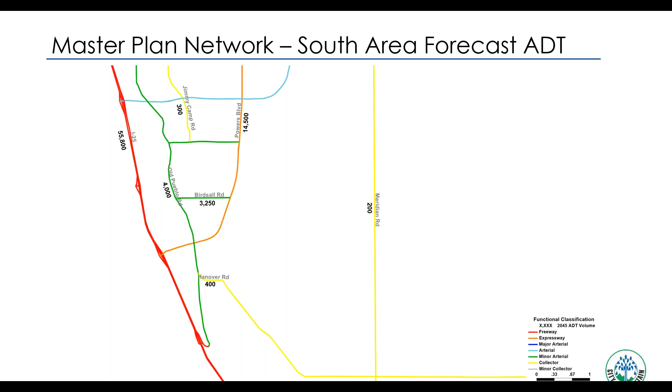Okay, just to let you know where we're going to go from here. We're going to be evaluating the carrying capacity of the proposed Transportation Master Plan network. We're going to use that to help create a funding framework, so we'll know the cost to build links that don't exist, the cost to widen - actually, I don't have the right bullets under this.

Anyway, here we'll be looking at what we know from the ODPs and reasonable adjacent, nearest neighbor, or county densities that we expect, and we'll redo the forecast that I just showed you - I apologize that I didn't fix these bullets. Then we'll develop cost estimates for the roadway improvements, and those will feed into creating the funding framework.

So you know that the City of Fountain approved an impact fee. They're not part of PPRTA, so that's something they're trying to do. The information from the Transportation Master Plan will feed into that to help them flesh it out more. At this point, I think it's my understanding that they've put in place kind of the same criteria that El Paso County has, but they know City of Fountain is unique, so this plan will help inform and change that. They'll also look at diversifying funding opportunities if there are state and federal options, and of course, with the funding, prioritizing.

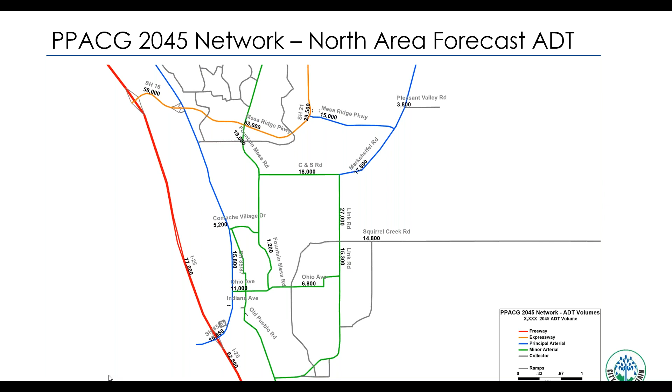My question is, have we looked at or can we look at adding a raised crossing somewhere, preferably in the south of Fountain, to allow more crossings? I know you said earlier you didn't want to add crossings to the existing railroad, and I understand and agree with that — that's why I'm asking about a raised crossing.

The other part of my answer was that we didn't want to have 2 crossings of Wilson and Link, but we did think it was a good goal to grade-separate the Wilson crossing. Yeah, okay, that's where I was going to jump in.

One thing we're actually looking at, because it makes some sense, is where Wilson and/or Link cross over the railroad. We're looking at the option of truly making that a grade separation ultimately, because we're trying to figure out from a geometric standpoint whether we can make that work with the grades and the existing properties that have access to Link in that area. We recognize that if the trains do stop, you have no way to get across without that.

Now, I think we all recognize there's really no opportunity to do any grade-separated crossings between Duckwood and Indiana at this point, just because of the proximity of the railroad and the properties. But we are looking at that, yes. Okay.

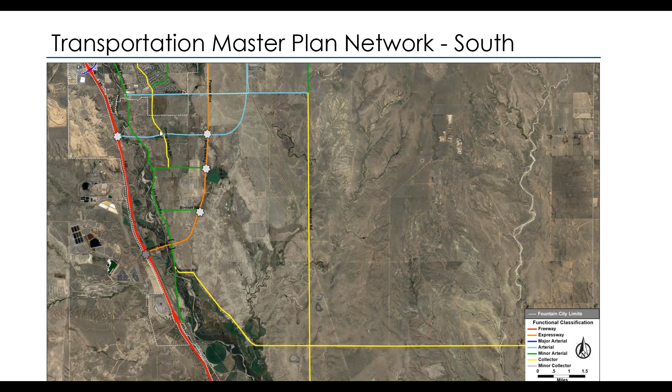Let's see, so CDOT is classifying it. Oh, you had it, go to that one, the CDOT one. CDOT is classifying it as a minor arterial.

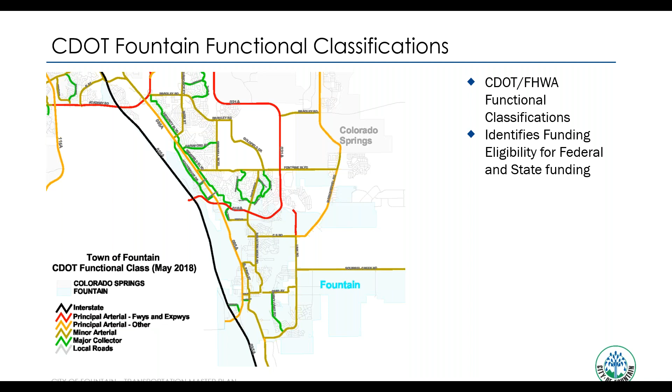Marksheffel to the north of Bradley is shown as an expressway. I wonder if it should continue as an expressway to create another ring road to complement Powers. Just a thought.

I'm going to ask Tucker for a little bit of clarification. So do you mean as it's coming south, through the city of Fountain, it should be increased to the same classification? I'll make that assumption and you can correct me if I'm wrong.

The reason it's staying at that classification is because, as you can see on this map, as you get further into Fountain, I've got homes on either side of that road, and the likelihood of me tearing down those homes is very small. If we had gone through this exercise 40 years ago, that would have been a different conversation. There still may be a day where Fountain grows to the point that all those homes are torn down and turn into apartments. I don't know, but I don't think I'm personally ready to put the city through that in the next 40 years. So I'm going to guess that was your question.

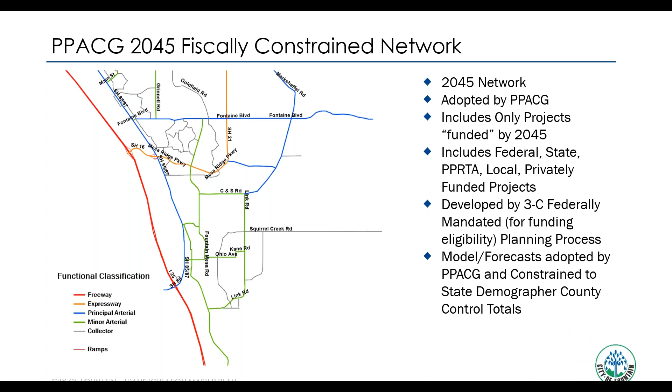Good question. Since that area up there is definitely outside of the city of Fountain, we haven't considered that. I think it does connect to the west as part of the county's network. I think so too, that the county had a connection, but I'm not sure who's here from the county on that.

I know Victoria's on the call. Yeah, Victoria, okay, I will unmute you if you want to jump in. It could be in the city, I'm not sure which, but my plot shows further north, and we didn't really do anything with the areas outside of the jurisdiction.

This is Victoria. Hey, Victoria. Hey, glad you can hear me. Yes, we do have it shown on the major transportation corridor plan as a connection, so we do have a little loop there that connects all the way out to Curtis Road, and then connects all the way up north to Briargate Stapleton. So that's going to be a planned link for the county to have a loop around Springs.

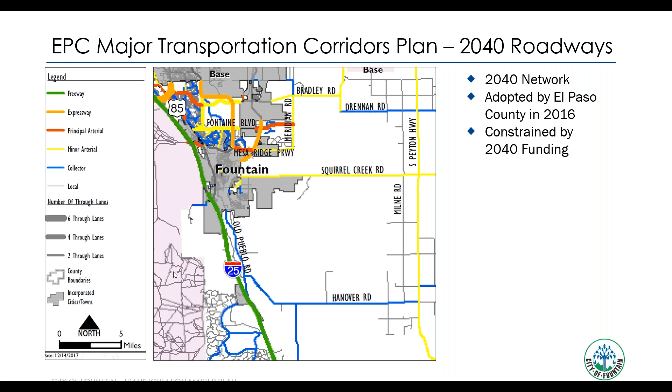Right, so that was entirely my fault for not including it in the PPACG network edit. Sorry about that, but again, we weren't concentrating on areas outside of the city. Okay.

The next question, and potentially the last one: when will this be adopted, and when will development TISs need to reflect this?

I'll jump in on that one. Our goal is to have a draft by the end of February. We'll review it internally and take it to City Council in March. A final draft, I'll give it until May, just in case anything comes up between now and then, but hopefully by the end of May we'll have this adopted and ready for the various agencies and engineers to reference as we move forward through the rest of 2021.

And the follow-up to that, will the development TISs need to reflect this as soon as it's adopted? Yeah, after it's adopted.

Great. And we do have one more question and one more hand, so we'll keep going.

I would recommend that the Wilson Road and Powers Boulevard intersection be developed, preserving the right-of-way for a future full interchange, even if the initial build is only a grade-separated overpass. Otherwise, you are completely dependent on future development further south to bring in another interchange to feed the south side of Fountain.

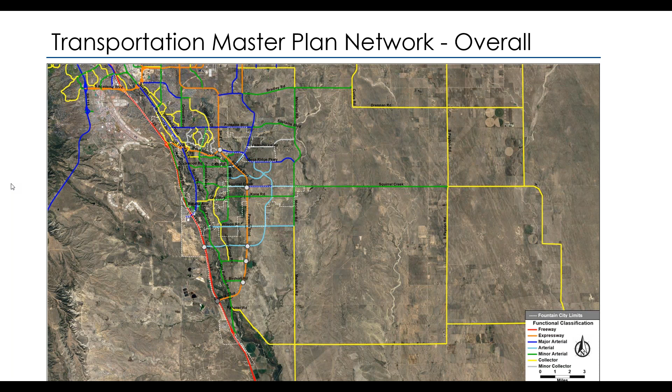Okay, Scott? Yeah, I just want to thank everybody for their time, their comments. It is an important plan for the city, and we want to make sure we're listening to everybody and understanding all the different challenges that are there, so we develop the best plan possible to keep moving forward.

I know that the city wants this plan to be very usable and an achievable plan, so it doesn't just sit on the shelf not doing anything. So I know that the efforts will be used here, and your input will be considered as we go through finalizing. Thank you everybody for attending, for being part of this and being part of the process.

These planning projects and planning processes are only as good as the participation we get from the stakeholders, and so we really do appreciate this. So things aren't done in a vacuum.

So with that, Brandy, any last comments? Yeah, so we're going to put the slides together, and then I'll send those out. We're going to put the most recent map together, and then I'll send that out.

Sharon, I don't know how we're going to answer your question, but you can always send me an email or call me after this meeting, since I have no doubt you have a question. We just can't get it so we can hear you.

Sorry about that. And again, when I send out the other information, if you have any questions, any comment, something you didn't want to say in this meeting, just feel free to send me an email and we can talk through it. We really just want to make sure everybody understands what we're thinking. By no means have we thought about everything. If somebody knows something we don't know that's coming, let us know so we can incorporate it.